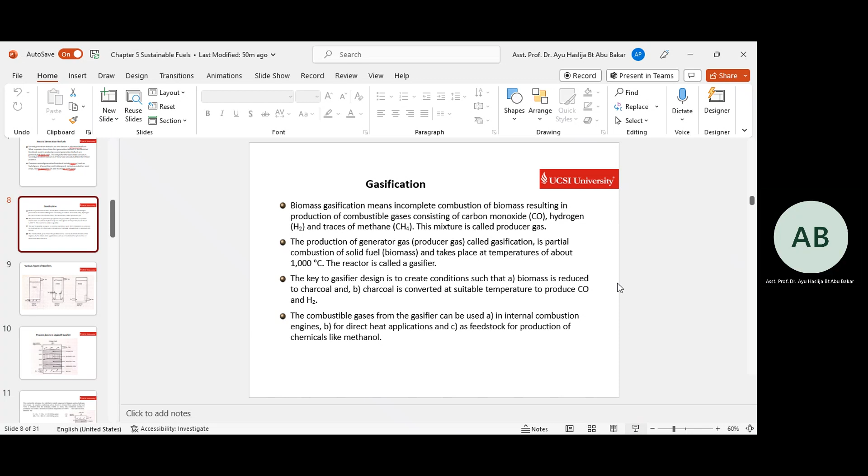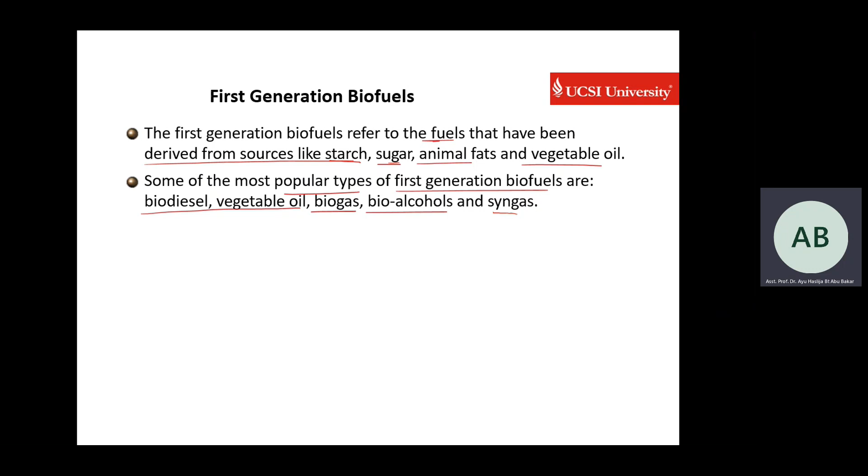Okay, now we proceed with our sustainable fuel. Last class, we had gone through the types of first generation and second generation biofuels. We know first generation is from food sources. Second generation is after they have fulfilled the food purpose. That means second generation, we can say, is using the waste.

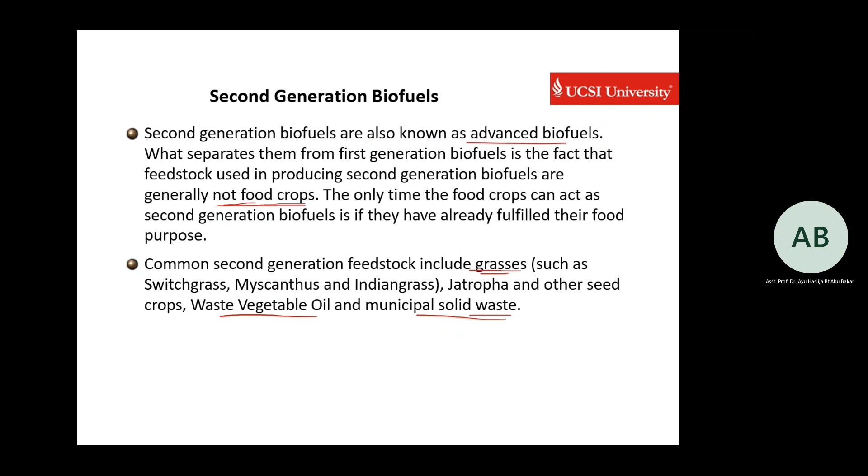Okay, gasification. What do you understand from the gasification process? I believe in your PDP there are some processes using gasification. Any idea what it is? What is the product of the gasification process? Gas. What kind of gas? It's called syngas or producer gas.

Okay, in the first place, why do you need this syngas? Gasification means incomplete combustion. We know in incomplete combustion, you will have CO, H2 and traces of methane, and perhaps traces of your fuel, soot, carbon.

Now, the purpose of using this gasification process is to obtain the H2 and CH4 gas. This is flammable gas, which can be used as fuel in other types of processes, perhaps a power plant. These gases are called producer gas or syngas. Gasification is partial combustion of solid fuel. Most of the time, it is solid fuel, biomass or coal.

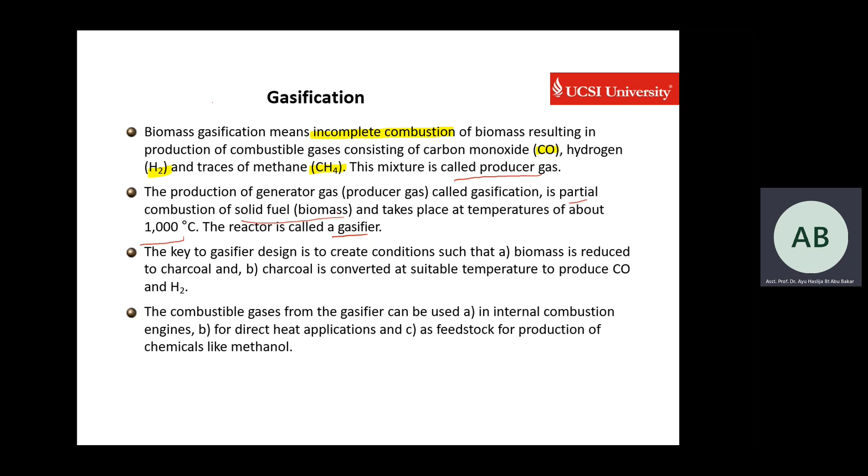Okay, and it takes place at high temperature. The reactor is called a gasifier. There are a few types of gasifier in industry. The key to gasifier design is to create conditions such that biomass is reduced to charcoal, then the charcoal is converted to CO and H2 at a suitable temperature.

So in the design, they want the biomass to be reduced to charcoal, and then this charcoal is converted into CO and H2. If you use a furnace or a combustion chamber, the biomass will be burned completely to form CO2 and H2O. The purpose of a furnace is to have complete combustion. If you require H2 gas, you will need to use a gasifier.

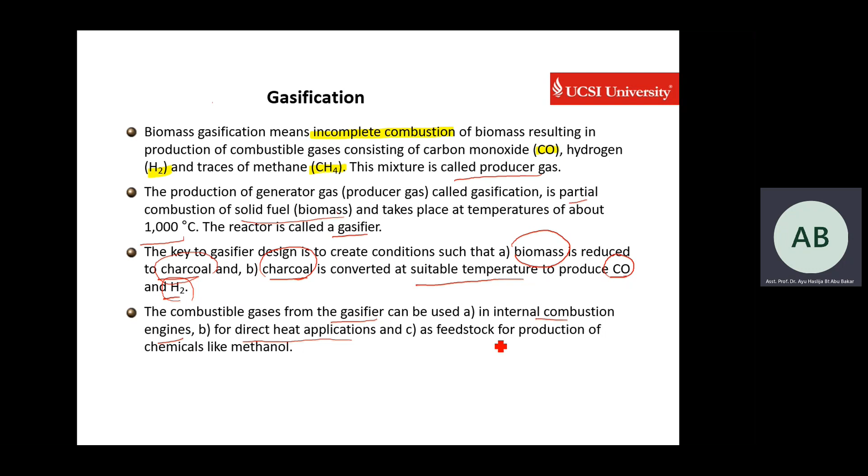The combustible gases from the gasifier can be used in internal combustion engines, direct heat applications, and also as feedstock for the production of chemicals such as methanol. So for methanol, this is where methane comes in. Methane you can use to produce methanol as fuel for combustion. H2 can be used as fuel as well because it is flammable.

And this H2 is used as fuel for the fuel cell. In the later topic on fuel cells, H2 is supplied to the fuel cell system. H2 plus O2, then you will have electricity. So the H2 used in the fuel cell can be produced from

the gasification process. Previous semester there was one question asking to describe or explain what fuel is used for the fuel cell and where you can obtain the fuel. So that question is focusing on H2 production. Where can you get the H2?

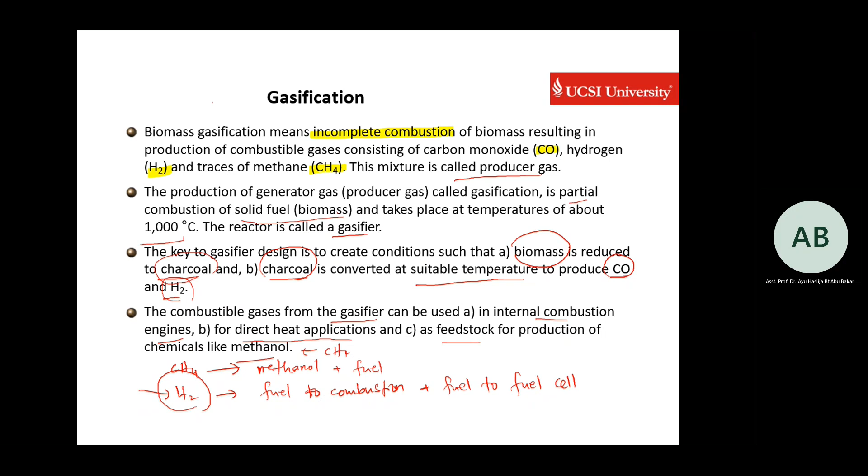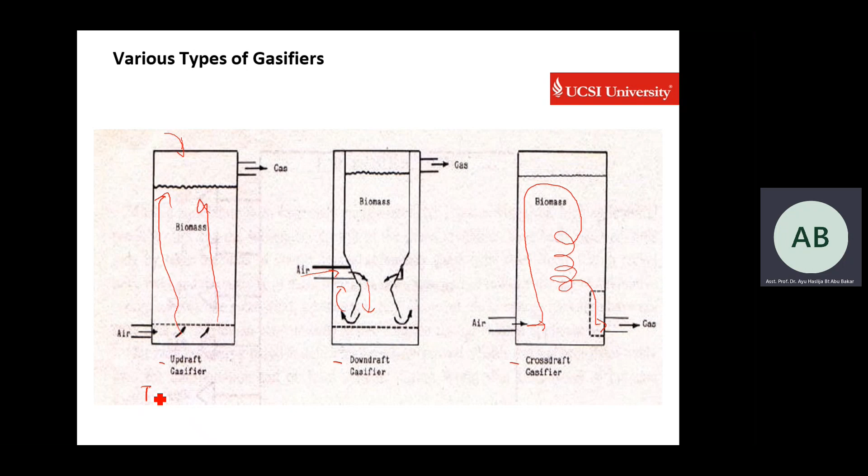Okay, so perhaps you can find out in the journals or on the website of any industry the types of gasifier used in the industry, and their advantage. Okay, so among these three, try to look out which one is more suitable to be used, more economical to be used.

Okay, in terms of, you find out the advantage. In terms of sustainable application, economic, here it can be from the design as well, design and costing. Okay, and ease of maintenance.

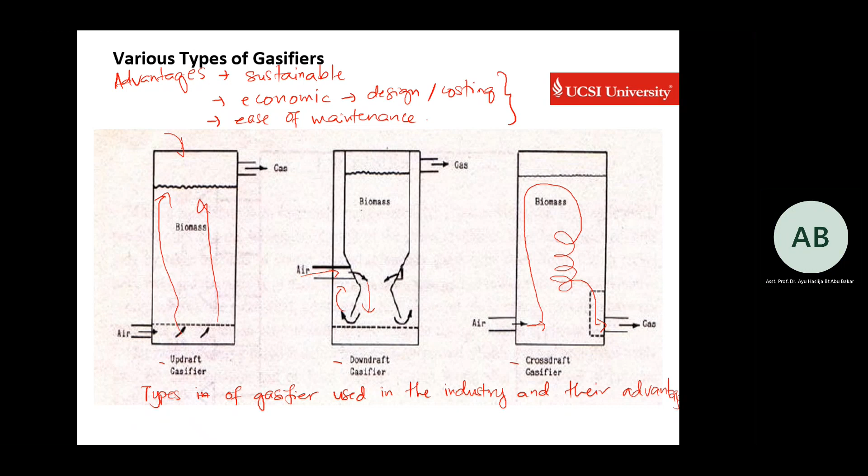Okay, these are the process zones in updraft. I use the example of an updraft gasifier. The air inlet from the bottom will flow upward. This down here is the ash pit. In here, all the biomass. Combustion zone over here. Notice the temperature range over here on the combustion zone.

So once the biomass is combusted, it will produce CO2, CO, H2O, and ash. That's why down here you have the ash pit. As it goes upward, here is the reduction zone. Notice the temperature is reducing as it goes upward. Reduction zone, pyrolysis zone, drying zone.

Drying zone, we know here it will remove moisture. Main purpose to remove moisture. The rest of the zones in the next slide will be the details. Okay, here gas will flow out on top. So here the gas will be CO, H2, CH4. You have also CO2, H2O in gas form.

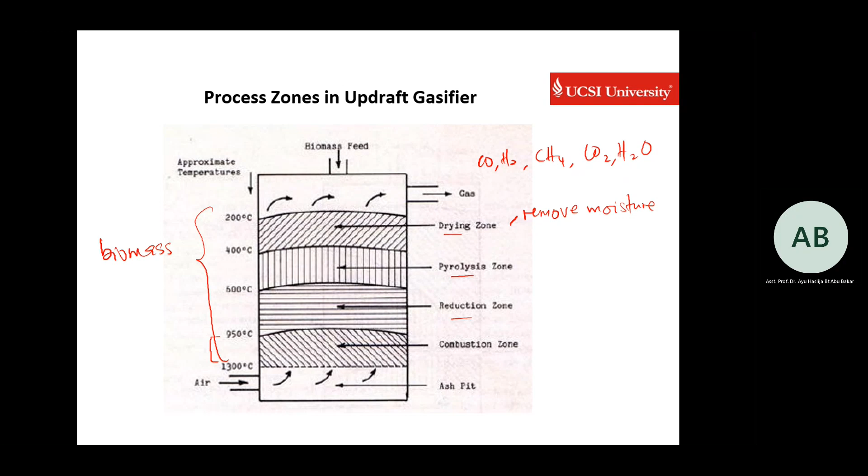Okay, the temperature range here you should take note as well, because each zone has its own temperature range. Now this one is the combustion zone. Combustion process. In complete combustion, CO2 is obtained, CO2 and water. So the combustion reaction is exothermic and yields oxidation temperature around this temperature.

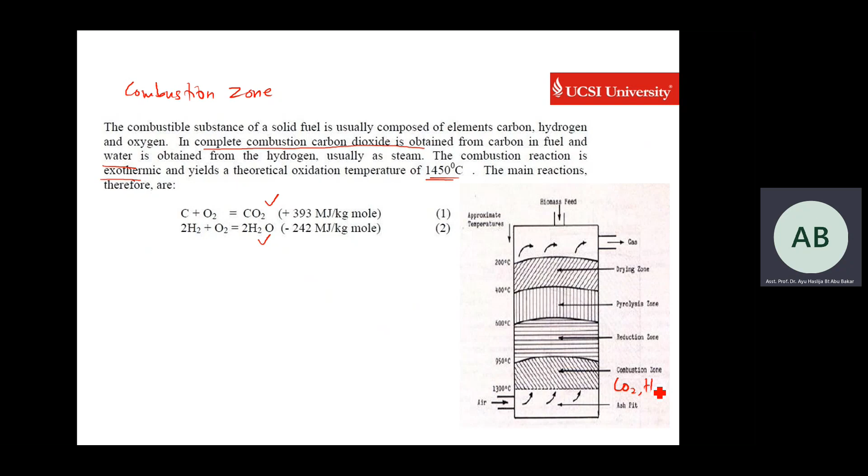The main reaction for the combustion zone, as I deleted the title, here is the combustion zone. This is what happens in the combustion zone. Carbon from the biomass reacts with the air, complete combustion, then you will have CO2 and H2O. These are the gases produced from the combustion zone. CO2, H2O. Okay, moving upward. Let me make the image bigger.

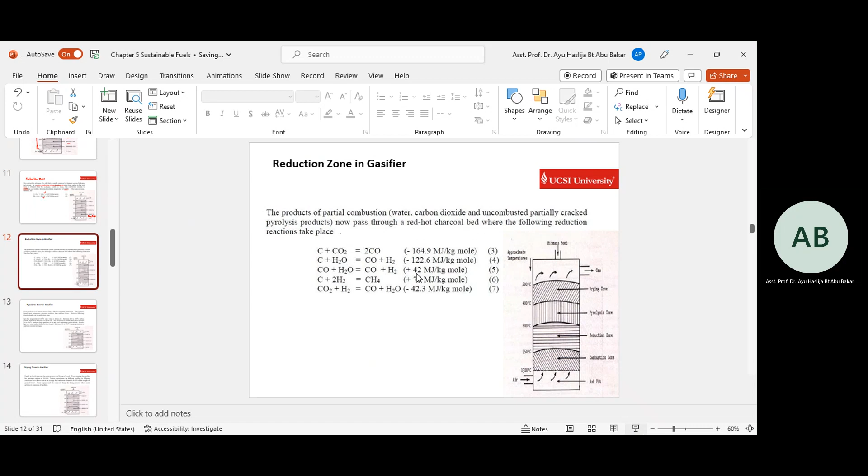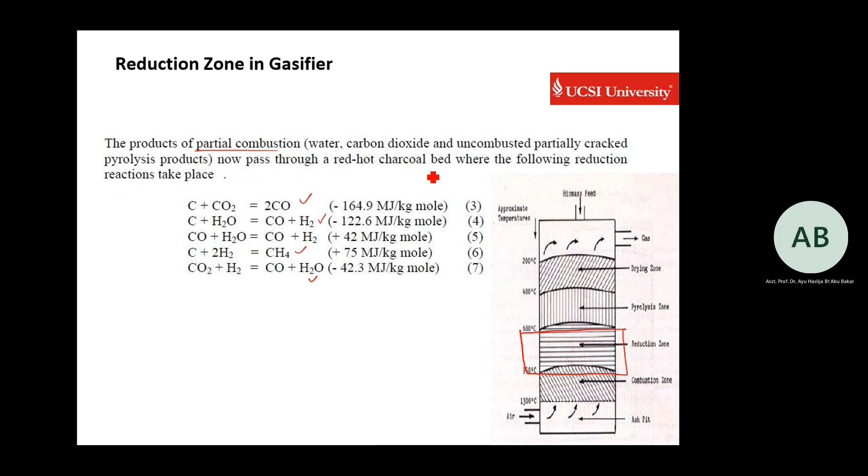Moving to the next zone, which is the reduction zone. This part produces CO, H2, methane, and some H2O, the products of partial combustion. So for the reduction zone, these are the gases produced: CO, H2, CH4, H2O. Okay. Now the temperature range is between 600 to 950.

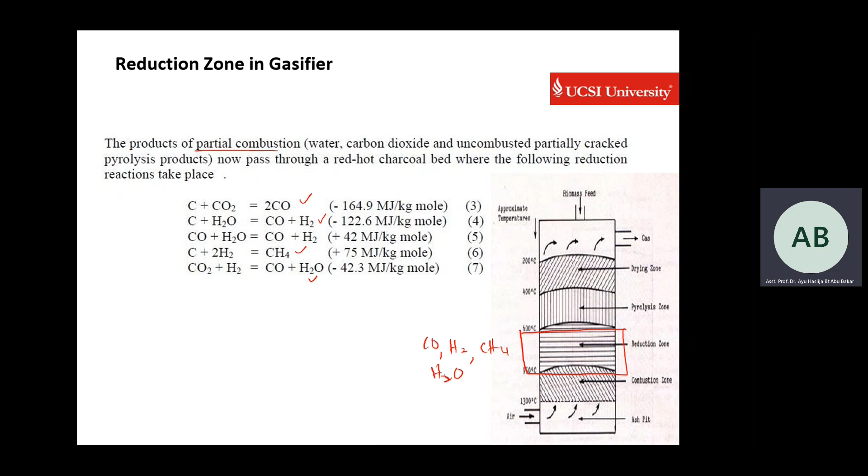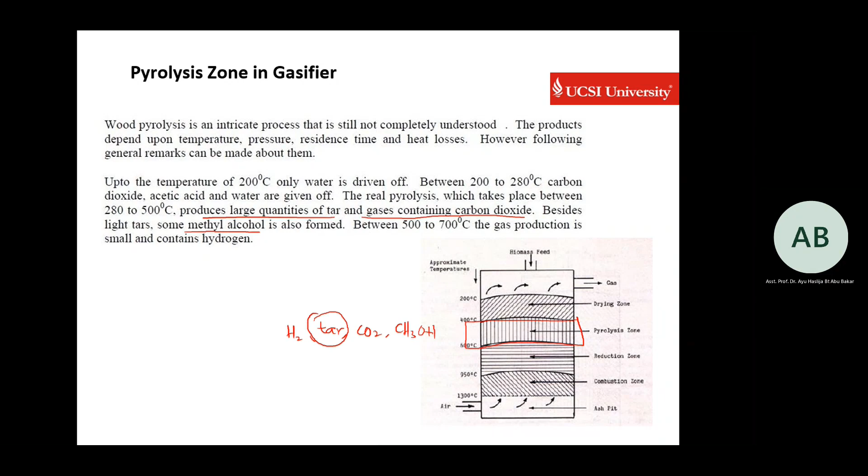Now here comes the pyrolysis zone. The temperature range is around 400 to 600. In this zone, it will produce large quantities of tar and gases containing CO2. You will have also methyl alcohols, methanol. So here you have tar, CO2, some methanol, small percentage of H2. Okay, this tar is in liquid form.

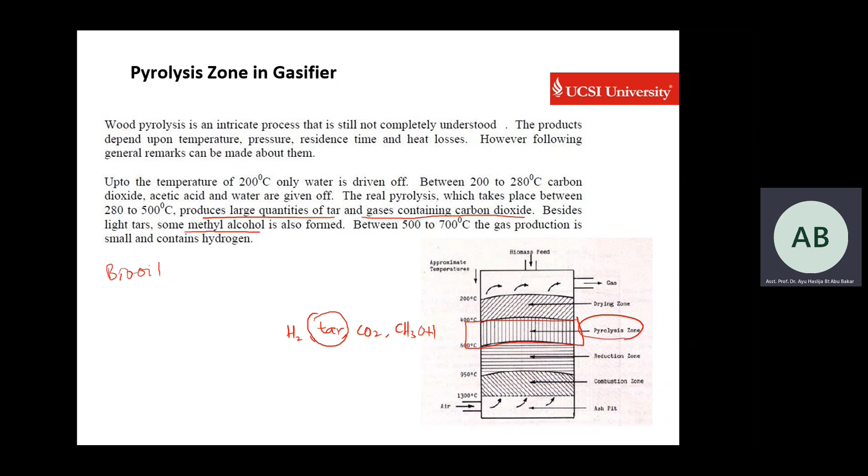If you read through a few journals, the pyrolysis process is the process that they use to produce bio-oil. If you have heard of bio-oil, it comes from the pyrolysis process. They use the pyrolysis process. The temperature is between 400 to 600.

Okay, now the drying zone. As we know, drying is mainly to remove the moisture. The temperature range is around this figure. So we have combustion zone, reduction, pyrolysis, and drying zone. Any question?

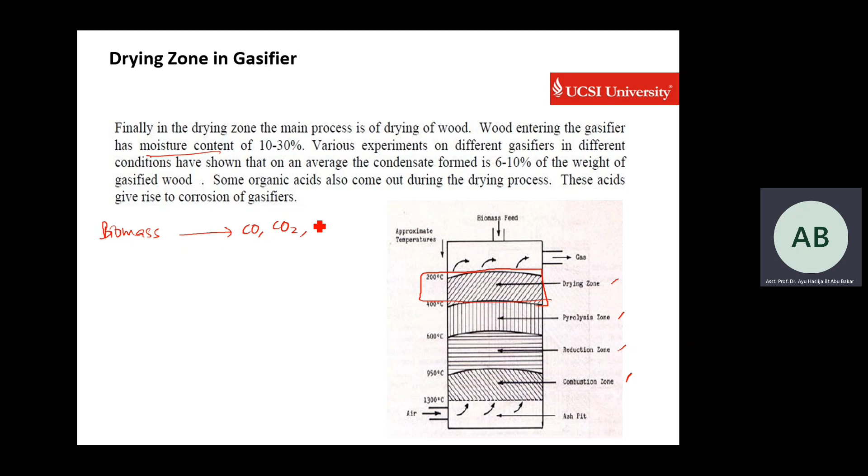From the biomass entering the gasifier, you will have CO, CO2, H2O, H2, CH4. This is gas. Some percentage of methanol from the pyrolysis zone just now. Okay, and for the liquid you have the tar or bio-oil. Charcoal is the solid product.

Okay, let's say for the gas, these are the gases released. But you only need H2, for example. What do you need to do to purify the hydrogen? It will involve several units, because you need to remove all those gases, CO, CH4. Yes, if it contains methanol, then you need to figure out how to remove those. Okay, all of this in gas form.

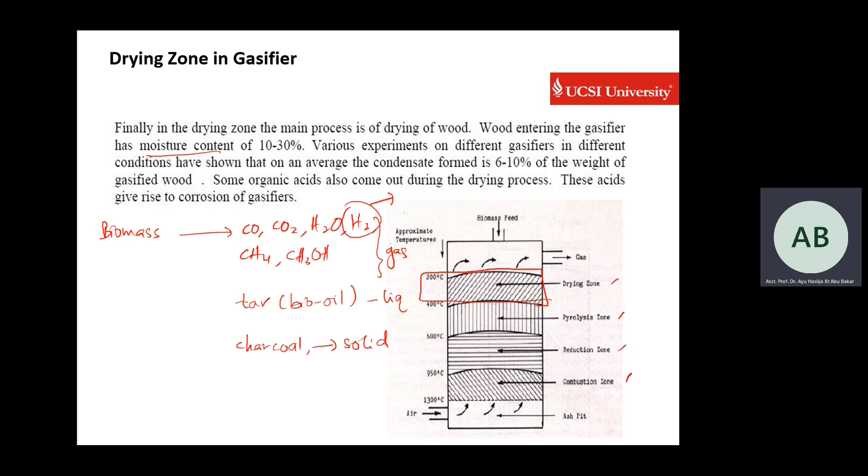Okay, this is gasifier conversion efficiency. For the efficiency, basically, this is the equation, where it involves the CV of the gas and the CV of the fuel: average CV of the gas produced from 1 kg of fuel, over the CV of 1 kg of fuel.

Okay, for example, we have here 1 kg of wood produces, please correct this in your notes, 2.5, not 1.5. 1 kg of wood produces 2.5 meter cube of gas with this average calorific value. The average calorific value of wood is this. So to find the conversion efficiency of the gasifier, CV of the gas over CV of the fuel.

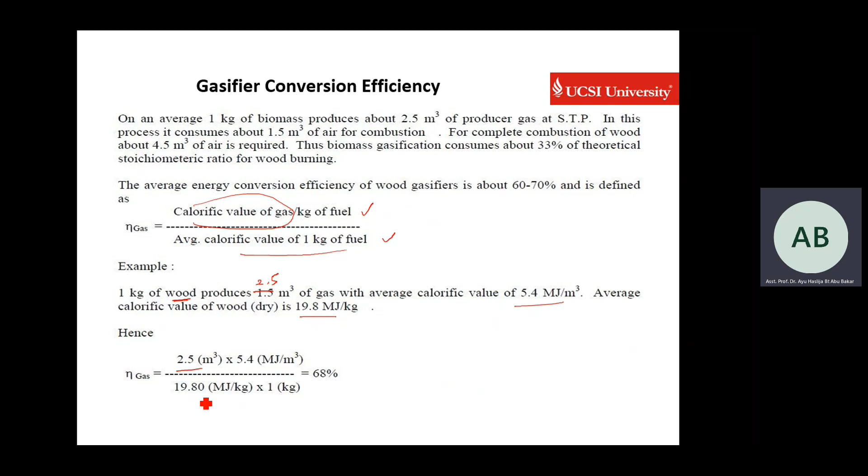This is the calorific value of the gas, which has been given, then the amount of the gas, over the CV of the fuel. This is the CV of the fuel. Okay, so from here, you can calculate the efficiency of the gasifier. Here, the efficiency of the gasifier is 68%.

How to increase the efficiency? What do you think? How can you increase the efficiency? Any idea? Remove moisture. You mean using dry wood, dry biomass? How is that related?

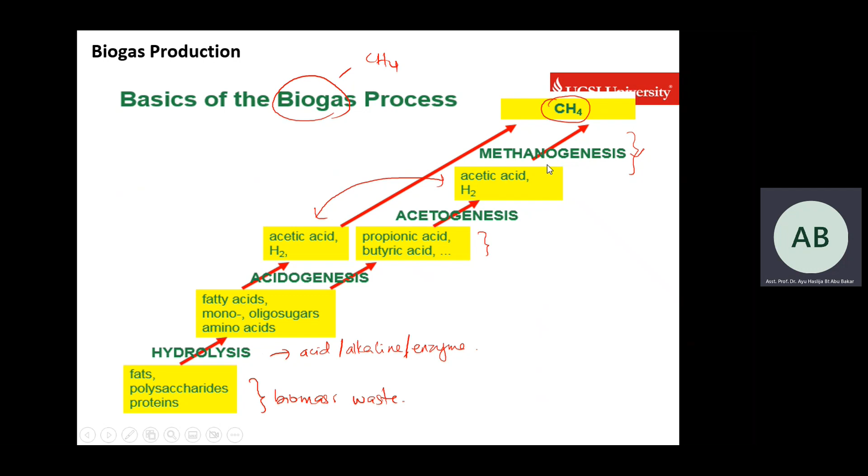Have any of you taken biochemical engineering? No. In biochemical engineering, this part focuses more on the types of microbes and how to take care of the microbes. So the detailed part will be covered in biochemical engineering. Okay, you can read through the detailed description for the biogas production.

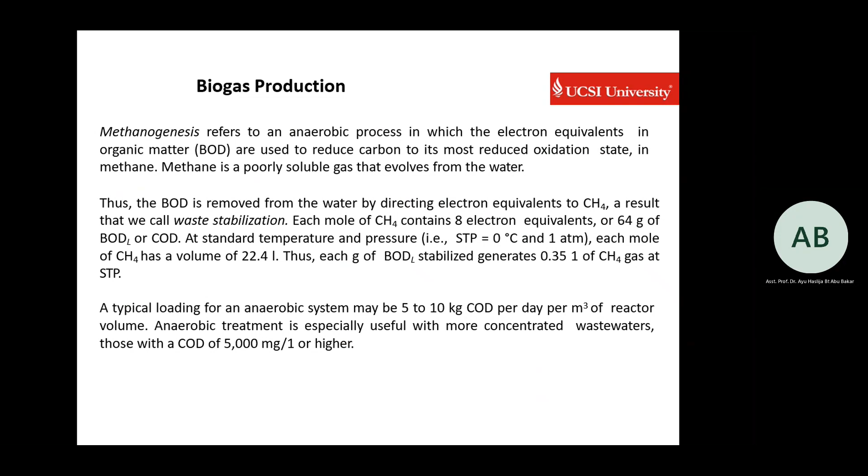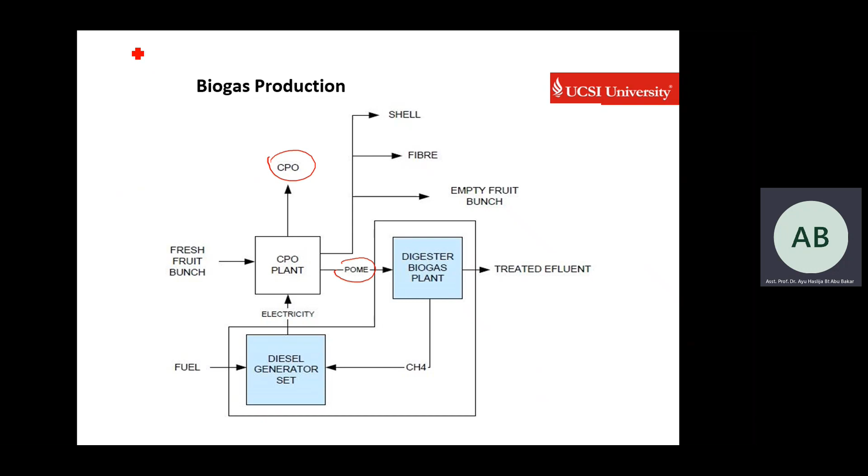Palm oil mill effluent. In the oil palm industry, you will see a few abbreviations, which are POME, PKS, sorry, PKC. Okay, POME is the liquid effluent. PKC is the solid sludge, palm kernel cake.

Okay, so this POME will enter the digester biogas plant. So now they are using the effluent, the waste stream. Okay, this is waste, waste stream. This is the main product, CPO. Waste liquid. The POME is in liquid form. So this part is also waste, but in solid form.

This solid waste can also be used as fuel to their combustion chamber and can also be processed to be converted into other valuable products. Okay, so from here, POME enters the digester biogas plant. Here it will produce the biogas, CH4, the methane. Another stream will be the treated effluent.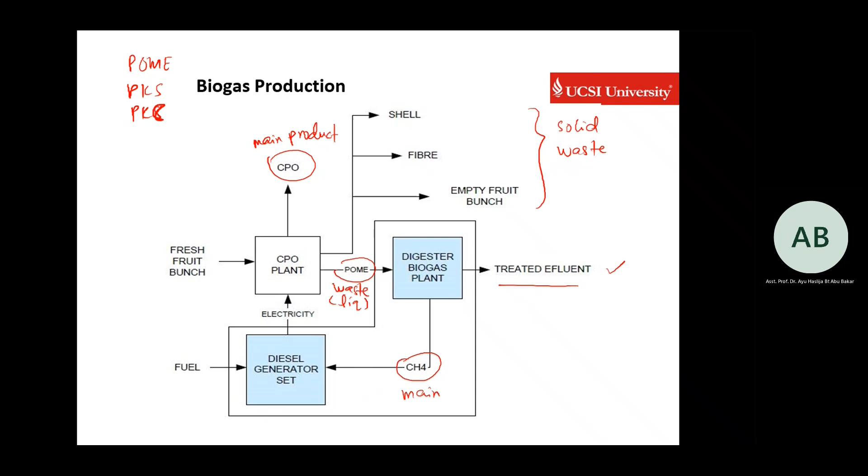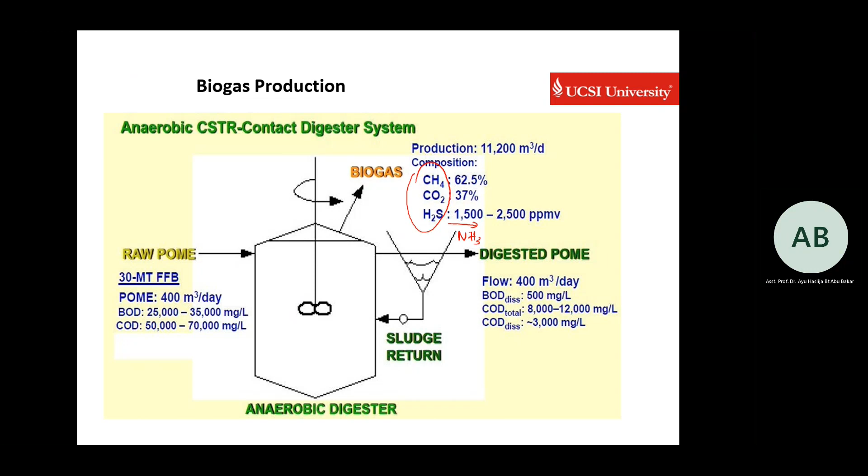Now I move to fuel cells. You have gone through fuel cells previously in other subjects, right? Physical chem, in the environmental engineering part. Nah. Physical chemistry, I remember last time I taught that subject, this one is included in the syllabus as well.

So a fuel cell is mainly a device that generates electricity by chemical reaction. Remember the electrochemical series, the galvanic series. Okay, but fuel cells only involve H2 and O2. The inlet fuel is H2 gas and O2 gas. Okay, and it generates electricity by chemical reaction. So this chemical reaction depends on your anode and cathode and also the electrolyte. The electrolyte is the important part over here.

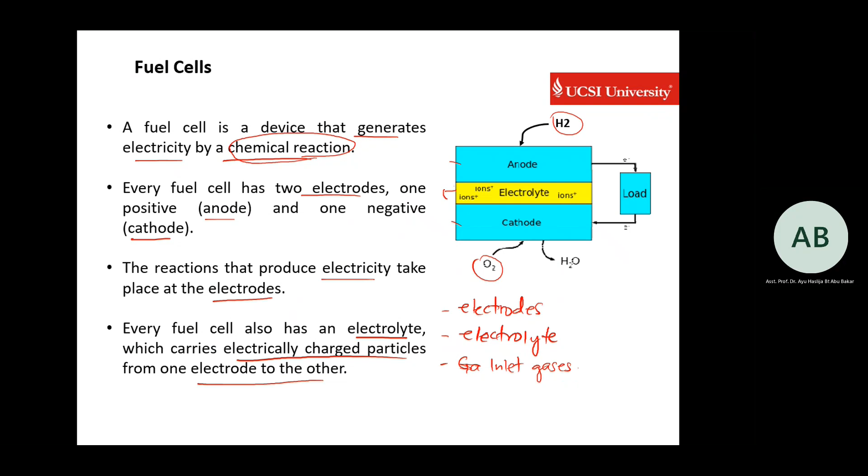Okay, there are different types of fuel cell. We have alkaline, we have solid oxide, we have molten carbonate. We will go through one by one, but generally, for all those types of fuel cell, the difference is in the electrolyte. Okay, alkaline fuel cells use potassium hydroxide as the electrolyte. So inside here is the electrolyte. It will produce hydroxyl ions, the OH.

Hydrogen enters, oxygen enters, oxygen at the cathode, hydrogen at the anode. Okay, so from there, it will react with the electrolyte, then produce water, H2O, and of course, the energy, the electricity. The efficiency of these alkaline fuel cells is around 70%. Operating temperature quite low, 150 to 200 degrees C. The cell output is around 300 watts to 5 kilowatts. It varies depending on the electrolyte used.

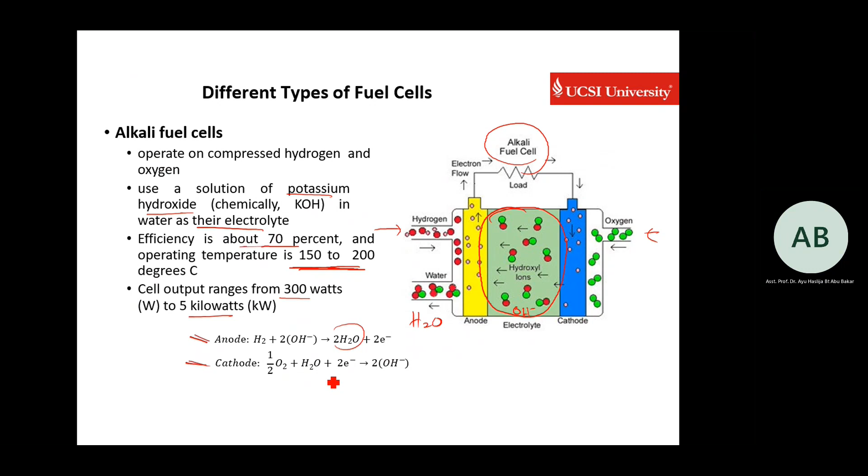Okay, the anode and cathode reactions are general reactions for all fuel cells. Later on, you'll see different types of fuel cell, the reaction is the same. It will produce H2O and also electricity. Okay, molten carbonate, where you will have different electrolytes. Here, it uses a high temperature compound of carbonate salts as electrolyte. Efficiency ranges around 60 to 80%, and it operates at high temperature.

Okay, in molten carbonate, from this figure, you can see the inlet gases, apart from H2 and O2, include CO2. It produces water as well, and also electricity. For molten carbonate, you have inlet CO2. This CO2 reacts to form carbonate (CO3) ions. It will react with the carbonate salt electrolyte. So at the anode over here, this is the reaction. Since it uses a different electrolyte, it will have these electrolyte ions. At the cathode, where it involves O2 and CO2, it will release the carbonate ion.

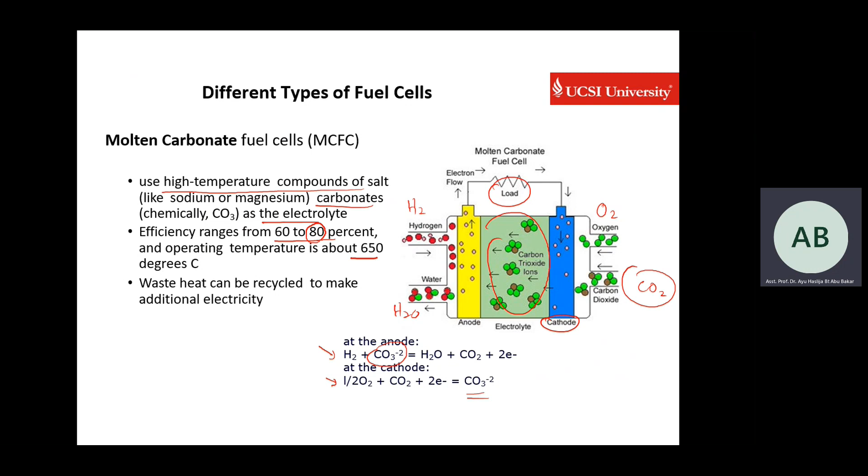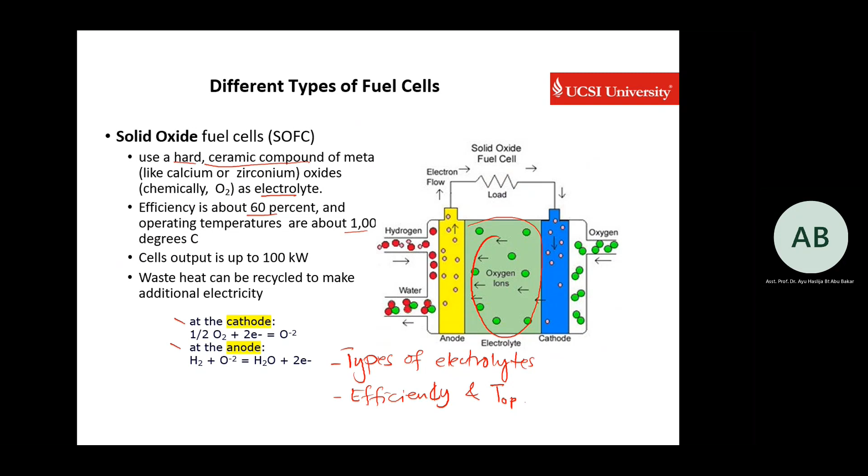Okay. Now you need to know each of these fuel cells applies in which type of industry. Let's say PAFC, try to find out what industry uses this. Okay, so those are the types of fuel cells.

This thermodynamic analysis is basically the general principle of the fuel cells. You will have hydrogen and oxygen as the inlet gases and produce electricity, heat, and water. The main target is the electricity. From the fuel types just now, we can conclude the PAFC has the higher efficiency with low temperature.

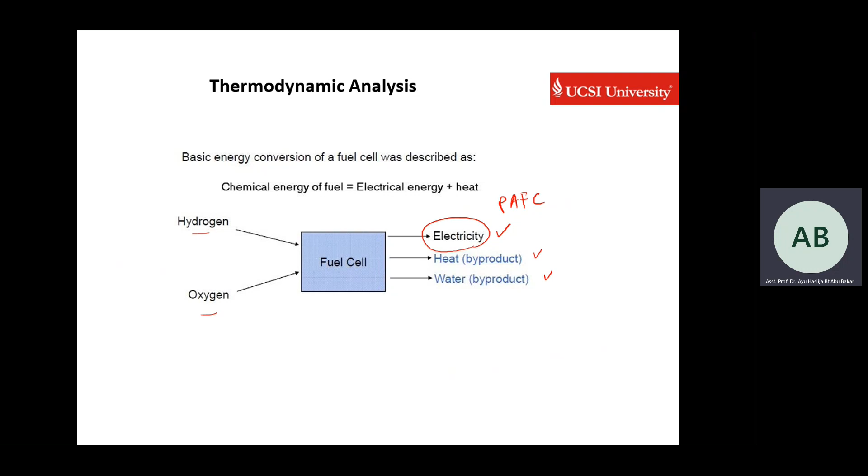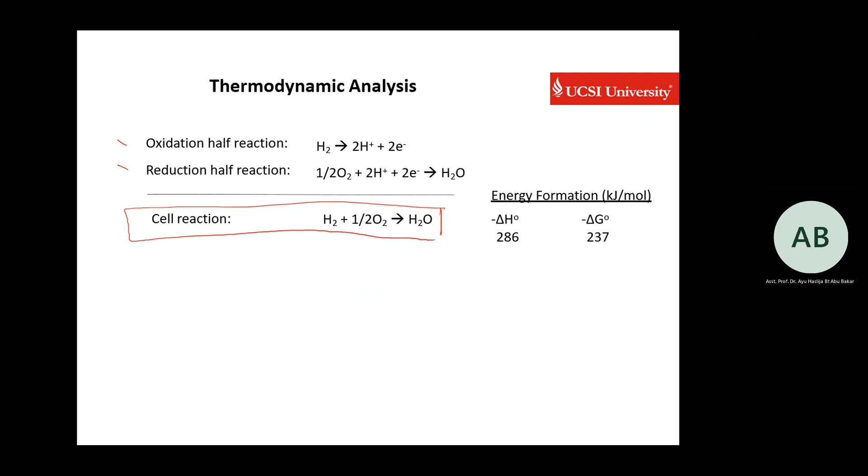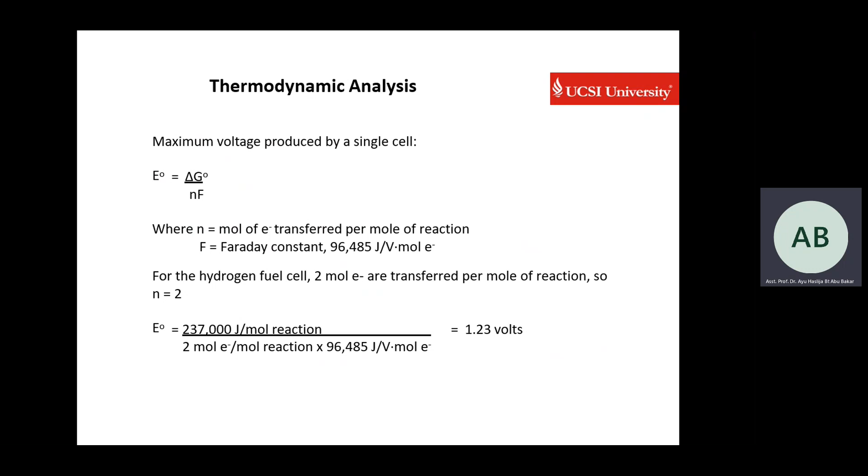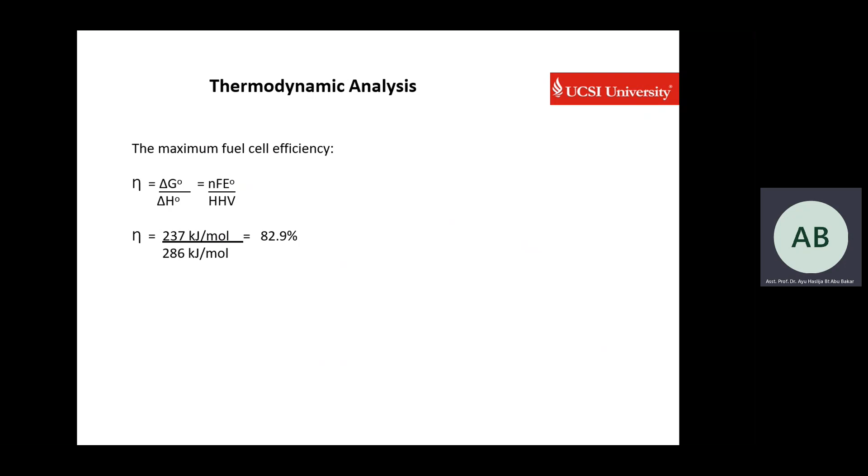This one, I will not focus much on: the thermodynamics, the energy, fuel efficiency. We just focus on the types of fuel cells. Okay, now we still have time.